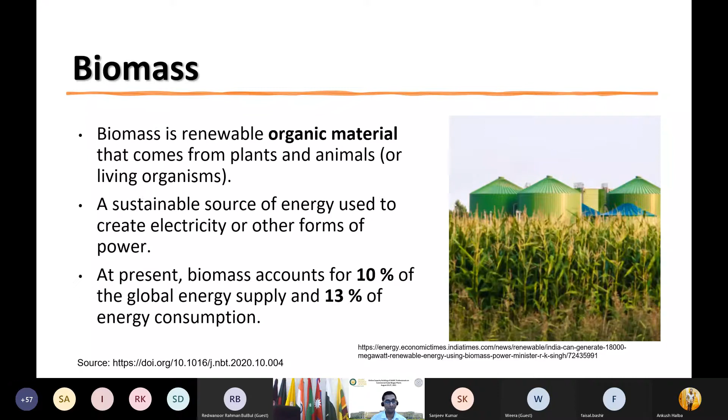So some of the examples that would be encompassed in biomass, or biomass feedstocks, or biomass sources would be the different trees or the crops. The first one is forest, then agriculture. Then we have the industrial residues, mainly the organic content, municipal solid waste that is coming after the use, animal manure, and also the sewage waste. So all this would come into the bigger ambit of biomass.

We'll again have a discussion on all these aspects as we go one by one, but just to give you an idea. And biomass can be converted into useful energy through a lot of pathways. It's not just biogas. We have a big range of thermochemical conversion, which would be used for producing different kinds of fuel.

If we go for low temperature, it can help to produce coal-like substance or oil from biomass using hydrothermal liquefaction or pyrolysis. There are processes like gasification for producing syngas, combustion to directly produce heat and electricity. We have the fermentation process, which can produce bioethanol, and a chemical conversion, which basically uses transesterification for production of biodiesel. And all these conversion pathways would be happy to take certain kinds of biomasses. And this is equally true with our focus, that is biogas production.

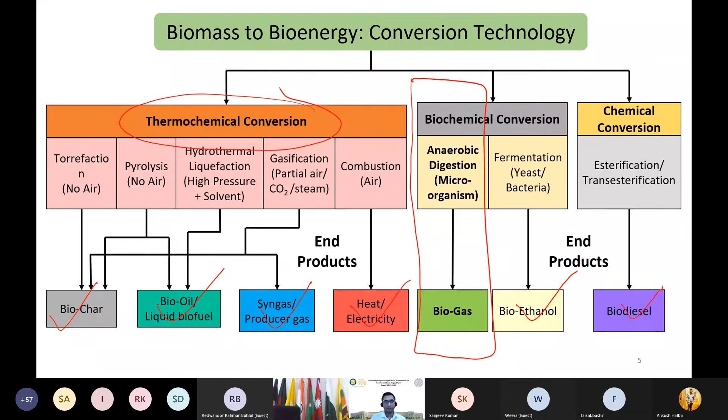So if I was to make a very basic guess of what kind of biomass would go very nicely with biogas production, or anaerobic digestion, as is the scientific term, because this process is anaerobic and it's basically a digestion by the different microbes. So we have the term anaerobic digestion. So I would need a biomass that has a good water content, at least more than 50%. And then I would also go for biomass which is less bulky and fibrous. So this is the area I'm looking towards for anaerobic digestion.

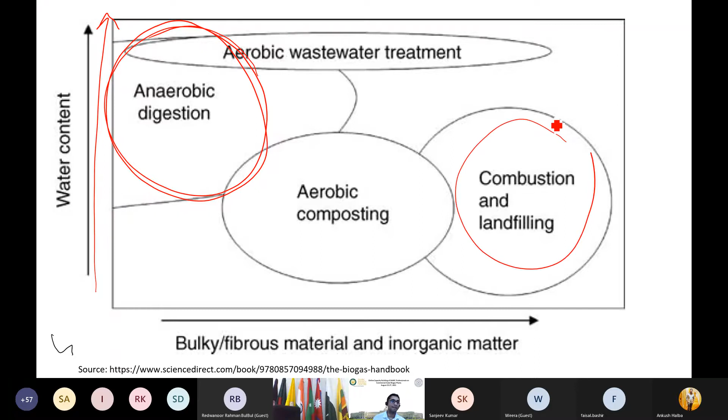So if you were to explain to a layman what kind of feedstocks you would use for biogas production, there are two things. It should be less bulky or fibrous, and less inorganic matter. If you have a biomass like wood, it's much more bulky, it has much more fibers, and it has some amount of inorganic matter in terms of ash, kindly go for combustion. Don't go for anaerobic digestion. And it is always helpful to have a good amount of water content.

So biogas, we have been trying to understand about it in the past few classes. It's basically a mixture of gas which would primarily consist of methane and carbon dioxide. So it's around 50 to 70% of methane, 30 to 40% of CO2, and then some amount of H2S, water, and some trace gases maybe. It can again be produced from a huge amount of feedstocks. And it is produced by the process of anaerobic digestion with methanogens or anaerobic organisms. It's basically a closed system which is happening in an anaerobic digester or a bioreactor.

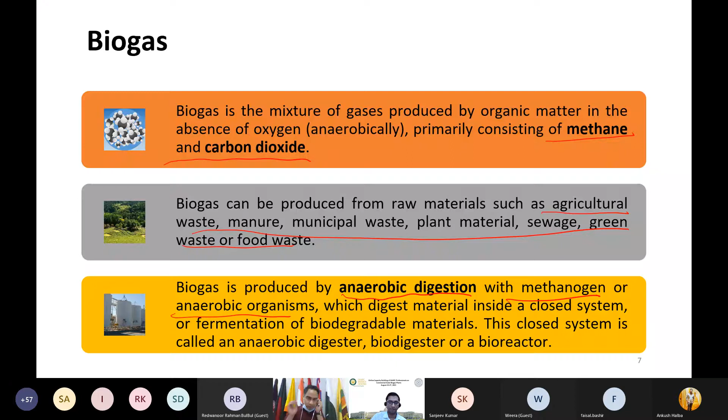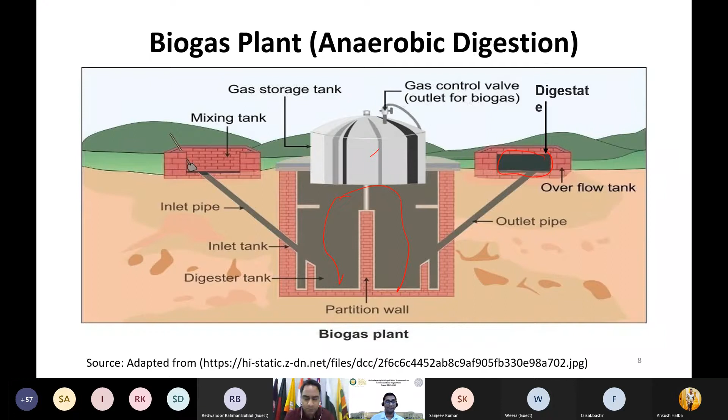And this is what a typical digester would look like. You all must have an image in your mind. You would have an input, and this is where the biomass gets digested, the gas gets collected, and then you have the digestate coming out from it. And this is how a typical biogas plant would occur. There might be different stages to it, different types of look to it, but nonetheless, most of the process looks similar. But inside it, there is something very complex happening.

And if we are co-digesting a number of feedstocks, which is a normal practice nowadays, these things become even more complex. Some reactions will be happening faster than the other, but there would be also some reactions which will be producing much more methane, which is our final product. So we need to see the trade-off and the balance between this. Like, do we need to produce the biogas in a faster way, or do we need the content to be more economic in nature?

So coming back to the topic of today's presentation, what are the different kinds of feedstocks that would be available to us? If I go with the taxonomic rank, the feedstocks could be divided into either a plant origin or animal origin, as simple as that. Then there could be the sector in which the feedstocks are getting originated. It could be the agricultural sector. We have the animal manure, which is by far the largest feedstock being used in the Asian countries, or in the SAARC countries, I would say.

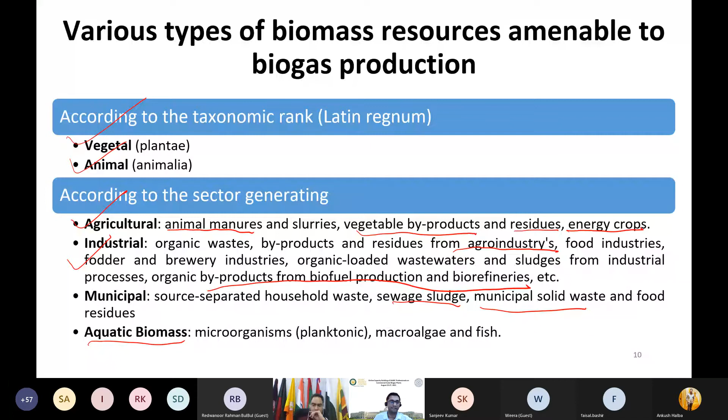Apart from that, there's one other way you would classify biomass. I've already taken you through two of them. One is the taxonomic one, meaning either plant origin or animal origin. Then the other could be the sectors. And then there is also what is called the generations of feedstocks. As the technology has been progressing, there have been different generations of biomass feedstocks that have been proposed. Around 50 years back, people were trying to produce bioenergy, and the common ways at that time were biogas as well as biodiesel, transesterification.

And what many people were doing is they were using the crops which were used for food purposes for production of fuels. And then there was a huge lobby against that. Like, how come you are using the crops that are meant for human consumption for production of energy? We have a huge population in the world which doesn't get food to eat, and at the same time you're trying to use these crops for providing energy for another section of the people who are very well to do. So there was a lot of opposition to that. It was reduced. So 1G feedstock basically means those feedstocks which have a food value attached to it.

Then the scientific community started looking towards different feedstocks which don't have the food versus fuel conflict. So this conflict has to be totally avoided. Then came the 2G feedstocks that mainly comprise the lignocellulosic biomass. And it's not lignocellulosic biomass as such, but it consists of the energy crops, including the grasses.

As well as the different residues. Now, these residues can again be divided into three types. First one is the primary residues, which means they're available in the agricultural field. A very common example is the straw that we see in the fields. It's spread out. You need some technology for collection of it, but it's available at the field, and that's called

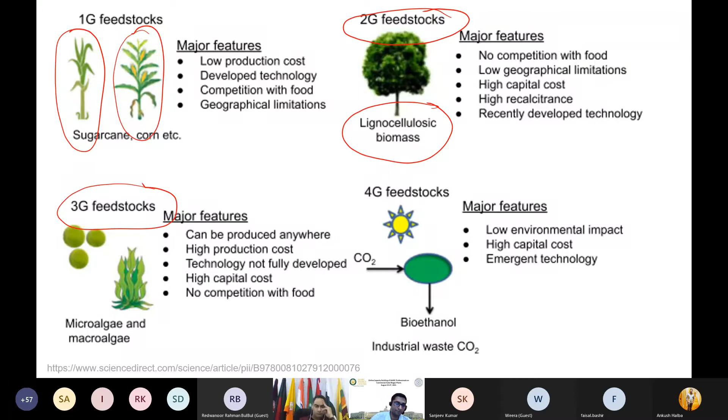And recently, they came up with something called 4G feedstocks. What I mean by 4G feedstocks is, can I genetically modify the bioorganisms to produce the final product? Now you have been hearing about different kinds of heavy metals or different things that can be prohibitive for production of biomass. Can I genetically modify the cell structures such that these problems don't arise in the future?

So any biomass feedstock that has been genetically modified to suit a particular application would be coming under the 4G applications. And very typical examples of these have again been algae. And there has not been much research into the production of biogas from 4G feedstock, but it has mainly been termed as bioethanol production.

So when we are going to talk about biogas, there could be either 1G. In 1G, there could be energy crops like maize, which could have a food value. Then the 2G feedstock, which will be coming from different residues, and a major among them would be cattle manure. Then 3G feedstocks, which would comprise the aquatic biomass. 4G feedstock is currently at the lab scale, and it won't do us any benefit if we talk about it as of now. But if any one of you is interested, kindly go and have a look into these.

Now, let's have a brief perspective of the SAARC member states as well. We'll briefly go through them, what are the major feedstocks available, and if time allows, we'll come back to this analysis again. So if I talk about India, and since I'm based in India, this is the country for which I would have the maximum amount of information. A lot of potential has been attributed to two things.

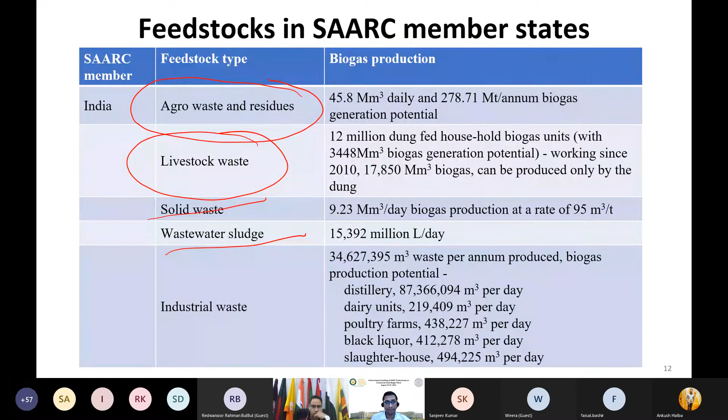Then we have a huge amount of agro waste as well. And a typical example is the straw waste that lies in the fields. We have a huge population, and with population also comes solid waste and wastewater. So these are the four areas in India which would have a huge biogas potential.

If I talk about my neighbors, Pakistan again has a huge amount of livestock, and this is where they can use it to produce a huge amount of biogas. Plus, they have huge metropolitan cities as well, and these metropolitan cities would be a source of both sewage as well as municipal solid waste, and they can be used very efficiently because earlier very archaic technology was used for the treatment of these processes.

But now the thinking is changing with the development technologies that are coming from the West. People now want to extract as much profit from the conversion of the waste as possible. So the waste are no longer waste, but they have a value attached to them. Nepal again has a good amount of livestock population which they can use for biogas production.

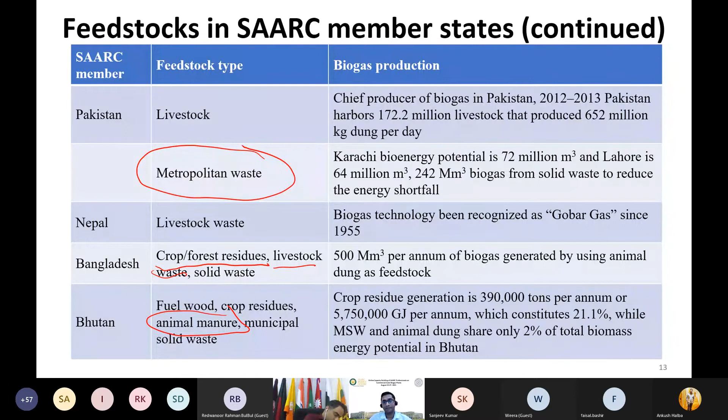Bangladesh, another agrarian country, could have a huge amount of crops and forest residues and livestock waste. Bhutan has a good amount of fuel wood, but it can't be used directly. It could be used as a co-digestion, but the major source again remains with respect to the animals. This is something similar for Afghanistan as well, which would have a huge amount of agriculture. And if I talk about my neighbors in Sri Lanka and Maldives, then there is the possibility of aquatic biomass there. I'll be coming back to this discussion towards the end of my presentation.

Okay, so let's go one by one to the different types of biomass feedstocks that are available. The first one and the most common being biogas, animal manure. In India, we also call this gobar gas. Now, gobar is the Hindi word for animal manure, and so you can see the relationship. A lot of things have been attributed to animal manure, and one of the primary reasons why animal manure was being used for biogas production was because it was a menace that people wanted to do away with.

At the same time, it is also responsible for a lot of emissions. If I go by the FAO statistics, animal manure is responsible for 18% of the global greenhouse gas emissions. And you would say, how come this is too high? The reason being, if I talk about the US statistics, this animal dung is responsible for 9% of the human-induced emissions and 37% of emissions of methane.

Now, methane, you need to understand, has a potential that is more than 20 times, depending upon the time scale you're looking at, that of carbon dioxide. So 1 kg of methane is equivalent to 20 kg of CO2. Plus, it also has some emissions with respect to nitrous oxides. So this was the reason why people wanted to convert this particular waste into value, because anyway methane was leaking out of it if you just leave it on the land. So why not have some energy being produced out of it?

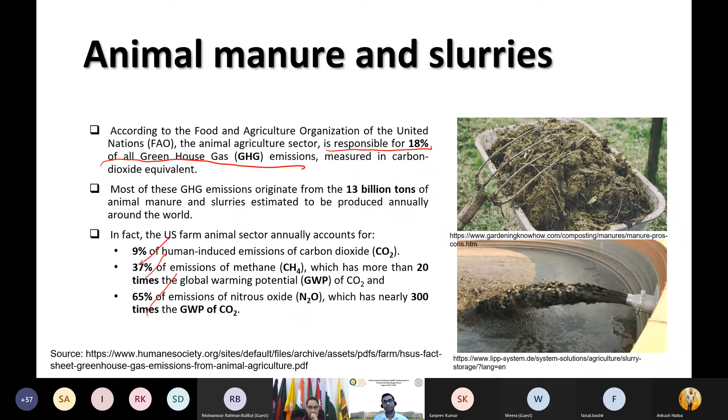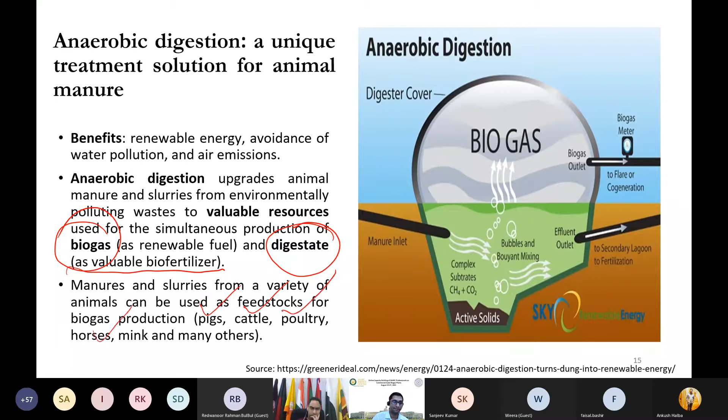And then anaerobic digestion came out to be a unique solution for animal manure. It was easily available. It was easy to operate, and the output was that you get biogas, and you also get a digestate, which is a valuable biofertilizer. And manures could be coming from a variety of animals. It could be pigs, cattle, poultry, horses. It could be different in different countries. But there could be a difference in the yield of the methane.

So I told you, the primary reason why people wanted to convert the animal manure was environmental. They were not looking at economic. The economic thing is something coming up very recently. When people started working, they thought there's value to it, and then they started quantifying it. So here I give a comparison of the type of feedstock and the methane yield. The methane yield could be either meter cube of methane per volatile solids, or it could be per meter cube of the input feedstock.

Now I remember yesterday someone asked which is the feedstock that would produce the most biogas. This question is a bit tricky to answer because the amount would vary based upon whether you're talking about the solids available or the volume, because we have a density that we need to multiply. When we are talking about slurries and solids, the density could be hugely different. So the methane that is produced per solid would be very different from the methane that is produced per volume.

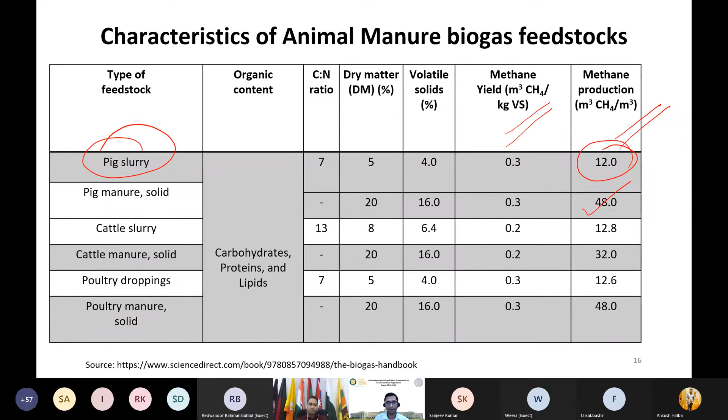So again, you can see if I am talking about solids, the methane content could be high in terms of meter cube, but in effect, I was always working with slurries. So I will also prefer to work in slurries, and this brings down the methane content, which is the major energy source. You also need to understand that not all the biomass feedstocks are going to give you the same composition of the gas.

Of course, one thing is to talk about the amount of biogas, and the other thing is we also need to worry about the methane content in that, because CO2 is not going to fetch us much value. Of course, you can bottle it and then send it to industries, but the usage of CO2 in the industry is not very great. The only thing that is going to fetch you an economic value, either as a transportation fuel or a fuel to the industry, is the methane content.

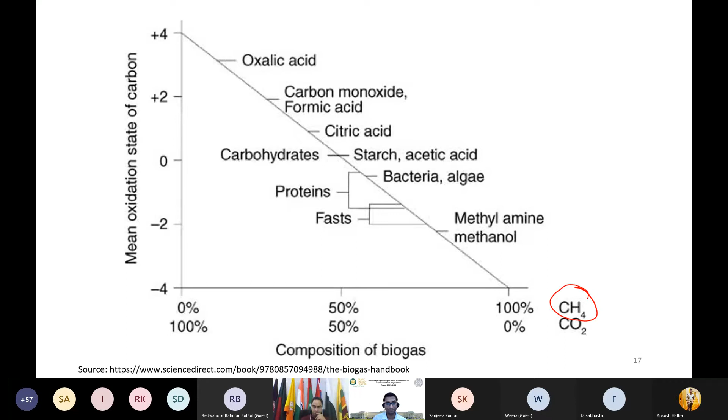So we need to be always also worried about what is the methane content. Sometimes it might happen that the methane content is high, but the absolute amount of biogas is low. So we need to be concerned about that. Now, what are the limitations with respect to the anaerobic digestion of animal manure? The first thing is low methane content. The methane content is not very great.

Then the transportation costs can be high. For animal dung slurries, it has been stated that if you are transporting them for more than 5 kilometers, the process is going to be economically not viable. Of course, these statistics would change from country to country, and there are no rules of thumb. But the general statistic has been that it has to be less than 5 kilometers. So if you're talking about large-scale biogas plants, which I believe most of you are interested in, all the cattle or the feedstock needs to be within 5 kilometers of range. Now that sometimes can be a challenge in itself.

Sometimes the slurries and manures can have a high content of lignocellulose as well. One of the reasons behind it is that normally when you go to the cattle sheds, they don't have a very clean atmosphere, and the dung would be falling on the floor and you would be collecting it. And there would be a lot of impurities going into it, and some of them could be lignocellulose. And when they keep piling up in the digester, this could lead to not so healthy conditions.

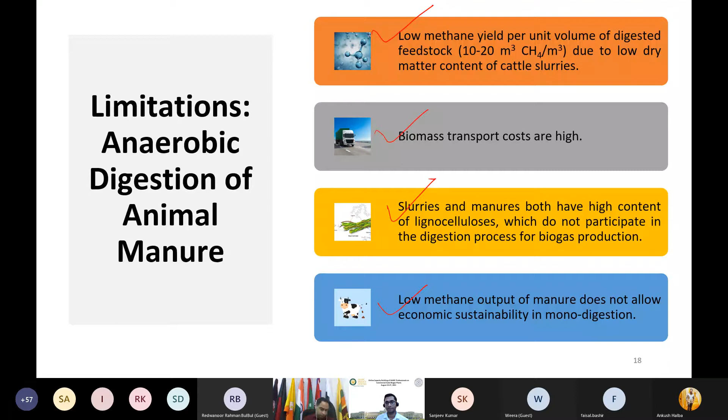And low methane output of the manure does not always lead to economic sustainability in mono-digestion. So what people have normally said is, if I just have animal manure, I would happily digest it with some other things rather than just digesting animal manure. Now remember, why did we start with animal manure in the first place? It wasn't economic, it was environmental. To make it economic, people are now suggesting co-digestion. By co-digestion, I mean using different feedstocks along with cattle manure.

And what are the advantages of it? First, it could lead to the dilution of some of the toxic substances in case the other feedstocks are coming from industry. It could help balance the nutrients because cattle dung has a very good nutrient balance. It also has a good supply of microorganisms, which could help. Economic benefits: it would increase your methane, and higher methane means higher economic benefits. It could also help in increasing the organic loading, which would mean higher methane, and higher economic benefits.

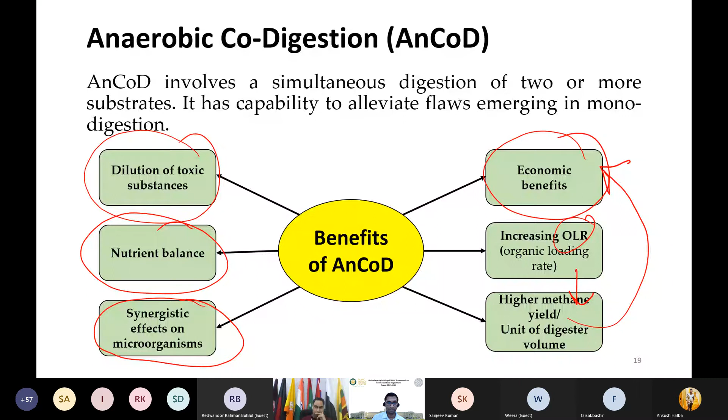So if you look at the future, and if you're talking about the economics and relying on the biogas too much, possibly it would be good to go for co-digestion. Co-digestion means you would use sewage sludge, municipal solid waste, algae, agricultural crops, or other wastes that are available along with the cattle manure. And cattle manure, being a very nice feedstock, would provide a buffer for fluctuations. It would help control any undue fluctuation and provide a steady operation for the plant.

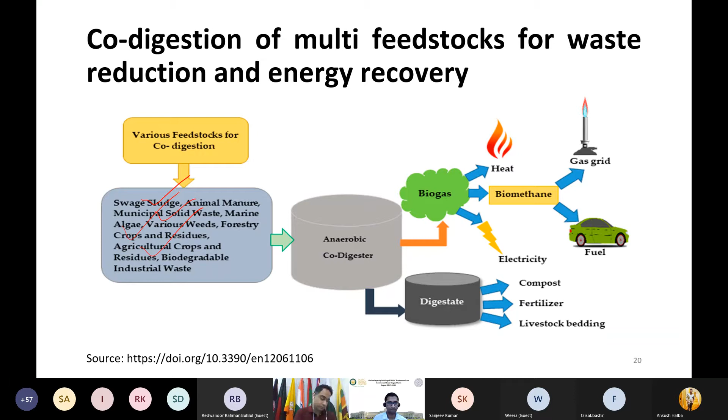And as I've already given you the example of the straw in India, this is one of the possible solutions that people want to look at. One thing you need to do when you have a feedstock like this is reduce the size. The typical size that would be acceptable in a biogas digester would be around 1 centimeter. It would ensure good digestion.

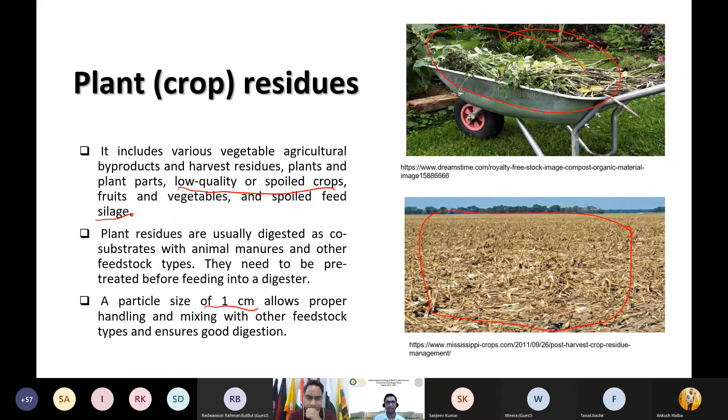And like my colleague, Professor Sanjeev Kumar, has already given you a glimpse of the different pre-treatments that might be needed. What really happens in the pre-treatment is that you decrease the size, and this would certainly be needed if you're talking about crop residues, because they have a good amount of lignocellulose. Lignin, cellulose and hemicellulose taken together are called lignocellulose, and this doesn't go very well with the bacteria or the microorganisms. These are living organisms, and you have to go by their likes and dislikes.

The first thing is you have to reduce their particle size. The other thing you need to do is break the bonds among cellulose, lignin, and hemicellulose. Till the time they are together, they are very difficult to digest. Once they are in the form of cellulose, hemicellulose, and lignin, they become somewhat easier for the bacteria to convert into simple molecules and finally into methane. So for these kinds of feedstocks, you would have to go for different pre-treatments.

And as has already been told, different kinds of biological treatments which are based on bacteria or enzymes are gaining a lot of prominence nowadays, the reason being they don't have any harmful side effects and they are not very energy intensive.

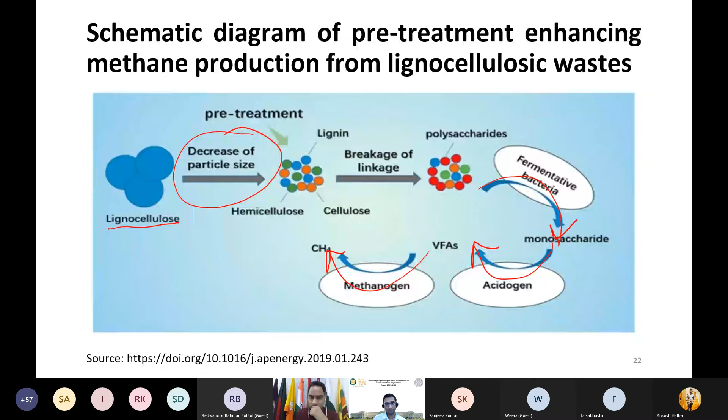Then comes, why don't we grow energy crops? There are many crops that are grown just for the production of energy. These kinds of crops wouldn't be seen in a good light in the SAARC countries, because we have a huge population load and we don't have much land to spare for growing energy. But nonetheless, we can discuss those. This is finding a lot of application, like maize is grown in huge quantity in countries like Germany or Sweden, where it is grown on a large scale for producing energy.

And again, there are different generations of energy crops. First, it was mainly crops which have food value as well. Then came the second generation crops like switchgrass and miscanthus. And now they're also looking towards the third generation, which is slightly different from the generations we have for biomass feedstocks. People have been going further. The advantage is that you have the energy crops.

And one of the previous disadvantages that I forgot to mention was, if you're talking about residues, those would be available only in the harvesting seasons, of which there could be 2 or 3 at maximum. Normally you would want to operate your plant in a continuous fashion. This is not a chemical engineering plant which you can start up or shut down at your leisure. These are bacteria, they have set up a colony, and they want to live peacefully as long as possible, so they would want the plant to run as long as possible.

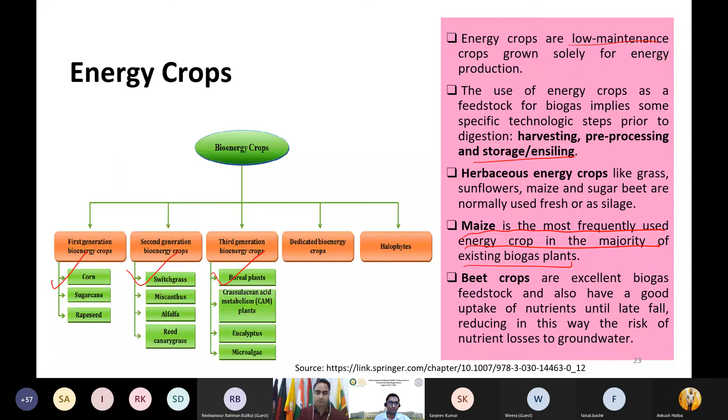And these kinds of crops can have a variable methane yield. You can see the methane yield could be very different. So we need to decide, and not every energy crop would be able to grow everywhere. But if you look, these are some of the prospective yields, and there could be a high difference among them. So we need to do some experiments before we go on with the setting up of an energy crop, specifically for bioenergy production.

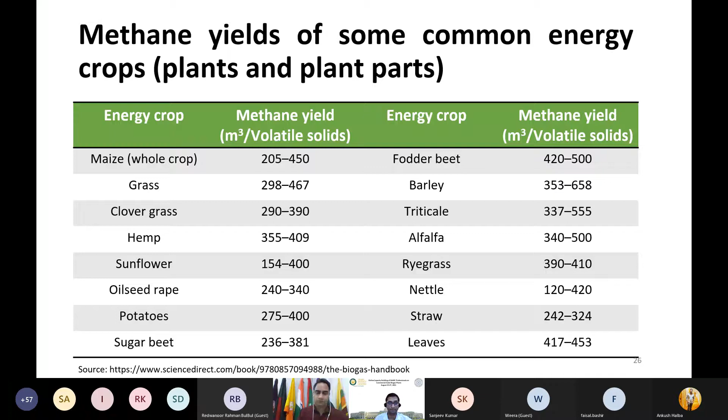Now coming to the limitations of energy crops. One basic problem that you would come across when you're growing crops specifically for the production of biogas is that the composition of the crop, and thus their suitability for anaerobic digestion, would vary with the stage of maturity. Now, if you are cultivating the crop 3 times in a year, I'm talking about some of the crops that are not available throughout, what would happen is, as time proceeds and as the crop matures, its lignocellulosic content will keep on increasing, and the moisture content would be decreasing.

So just see any plant that you have planted in your life: in the initial stages of its life, it's much more green and starts to build up more matter as time proceeds. And this is true with energy crops as well. So as far as the suitability for anaerobic digestion is concerned, we would like to cut these crops while they have a huge moisture content. But this makes it difficult for storage. The storage life decreases if we are cutting the crops when they're still not matured.

If I go to the other dimension, if the crops are getting matured, they have a good amount of lignocellulose, the storage becomes easy, but at the same time, they would need a good amount of pretreatment as well. So this is a trade-off: you would need to understand at what time you need to harvest your crops. If you harvest it early, it would be good for biogas production, but bad for storage. If you harvest it later in its life, it would be good for storage, but you would need a pretreatment for biogas production. So this is a trade-off you should be able to answer if you're looking towards energy crops.

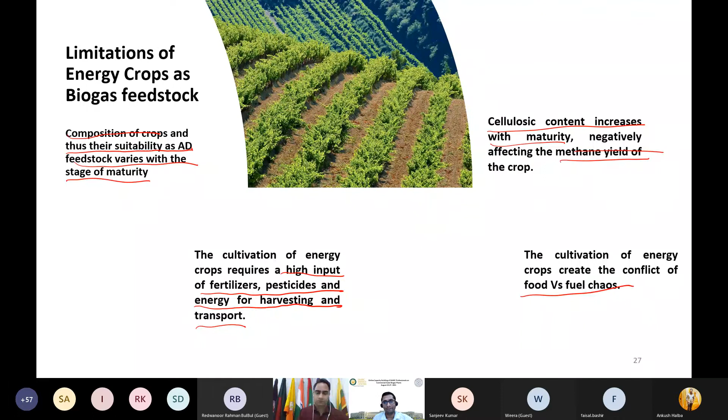Then it also needs a high amount of fertilizers and pesticides, and there's energy in harvesting and transportation as well. So if you're using high-end equipment for producing these crops, it would need energy and you need to justify that. Again, the cellulosic content will increase with maturity and it would negatively affect the methane yield. And in countries like ours, like in the SAARC countries, there is going to be a food versus fuel chaos, whether we can use this land for energy crop production.

And then comes another feedstock, which is called the industrial feedstock. Now we have huge industries. To give you an example, there's the food and beverage industry, fodder industry, fish processing industry, milk, starch, pharmaceuticals, biochemicals, cosmetics, paper and pulp, and of course, slaughterhouses. So these are huge places which have a huge amount of side products or co-products. And biogas could be one of the avenues for making use of this, because most of these are available in a localized fashion. You don't need a collection cost or a transportation cost.

But the problem is that they could have their own issues; they could have some inhibitors or some characteristics that make them unsuitable for long-term use in the production of biogas. And that is why a common term used for feedstocks like this is methane boosters. Why don't you run your biogas plant based upon the feedstocks that are available in plenty, something like cattle manure or residues, and then use these feedstocks as methane boosters? Because if you put too much, or if there's a fluctuation in the properties of these feedstocks, this could render your process useless. But at the same time, some of these feedstocks have very good methane yield, and that is why the term methane booster is being used.

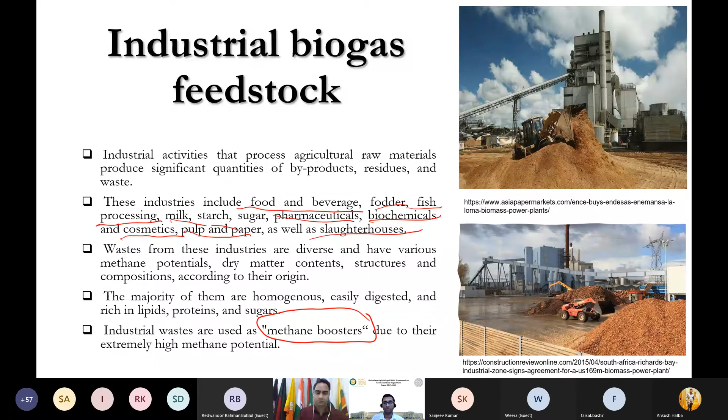So what people are proposing is, base your biogas plant on some of the feedstocks that are easily available and use these industrial feedstocks as methane boosters, such that the plant doesn't go to either of the extremes, if you are considering the pH or other contents like ammonia, which are not very good for the functioning of the plant.

Again, these kinds of feedstocks can be digested either in decentralized large co-digesting plants or at the industrial production plants. But if you go for co-digestion, they can help provide increased process stability and less sensitivity to inhibitors like ammonia and sulfide. So again, co-digestion is one of the things that has been proposed as the to-do thing if we are planning to use industrial feedstocks, because if we are not aware of what kind of things will be coming out of it, there could be troubles.

And also, as the regulations are increasing, and this is specifically true for the European countries, they wouldn't want the fertilizers or the manures that are coming from the biogas production, if the feedstock is coming from a harmful industrial product, to be used as a fertilizer. And this is quite apt as well. These kinds of regulations might not be currently there in the SAARC countries, but in the future, as we are growing more and more sensitive towards the human needs, these kinds of regulations come in. If the feedstock is coming from an industry that involves some pathogens or some harmful chemicals are being utilized, and the fertilizer is coming from the anaerobic digestion of that, there could be issues.

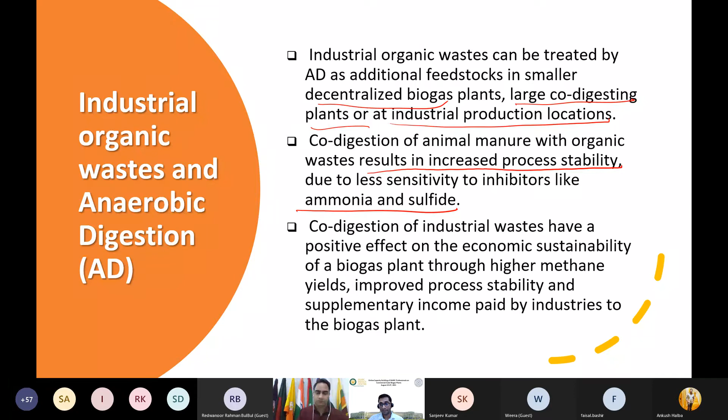Again, I've tried to highlight this fact. One thing that is coming up in a big way, or that is showing a lot of potential, is the concept of biorefinery. So a refinery is a chemical plant which has a lot of products. And earlier people were talking about either biomass gasification or anaerobic digestion or biodiesel production. But now they want to look at biomass as a whole, because different features of the biomass could be used for production of different kinds of products.

And this is true with the bioethanol products. In India, we are going at a very fast rate with the production of bioethanol that can be coming from biomass. And one of the leading countries in this, of course, is Brazil, which has a huge sugarcane population. And these bioethanol plants can have a good amount of silage that can be used in anaerobic digestion. And this could be used for production of gas that could be used either for electricity purposes, or as a fuel. Methane is an energy carrier, and it's up to you how you want to utilize that.

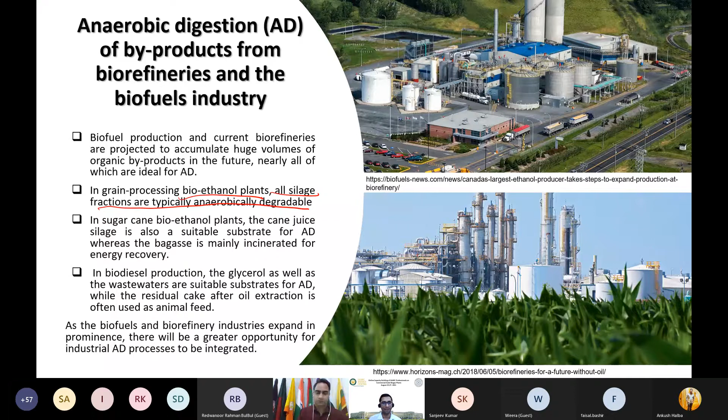Then comes the municipal solid waste. And here I use the term source separated organic waste, which means people have been comparing the different waste, how it comes in. And it's always good to use source separated organic waste. And this is being done very well in the industrialized nations. If I talk about India, this practice was initiated around 5 years back, where we have different bins for different kinds of waste, but it hasn't been able to get as much traction as needed. But as time proceeds, I am hoping that awareness would be reaching, and we would have source separated organic waste available from our homes. And if that is the case, this waste could very well be used as a biogas feedstock.

And again, we have the different community kitchens or messes that we have in different campuses in India, like campuses of different big universities or different corporates. They are very nicely doing biogas from waste, but again, they have a centralized location in terms of the community kitchens. But if we are able to do source separation at the homes, this could very well be done on the city level as well.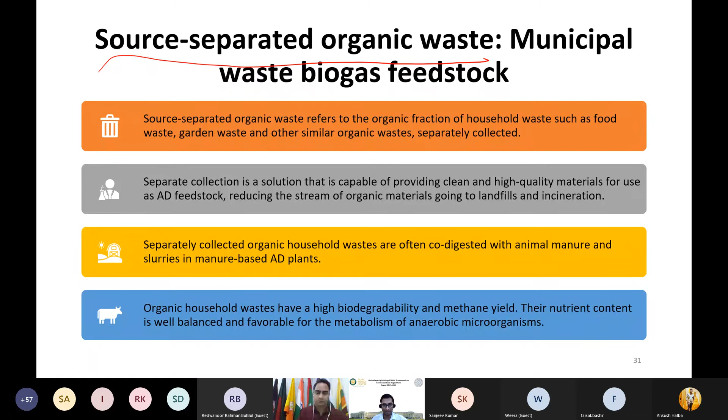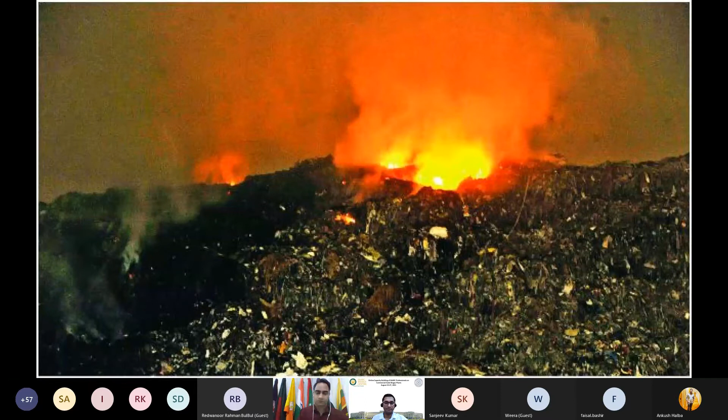Because what is happening is, anyway, when this waste goes to the landfills, there are fires. If you have seen the landfills in India, we have huge landfills outside the cities, in Delhi, Mumbai, Chennai. The moment you are out of the city, you would have a picture like this. And if you happen to see them at night time, you would see the fires burning. So this is nothing but methane escaping and burning. So rather than methane escaping, why don't you use that for converting to biogas? And then there's another technology which is called landfill gas.

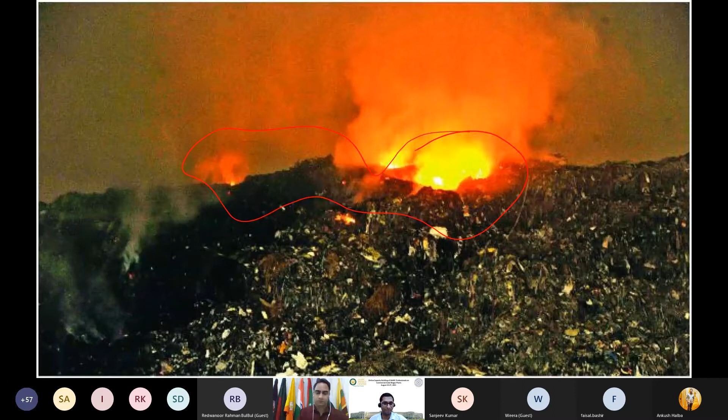That is again something very similar to biogas production. I wouldn't dwell into that. That's a different technology altogether. But if someone is interested, this concept is gaining a lot of prominence again in the industrialized nations, that they would capture this landfill gas and then use it, because methane is anyway coming out. But it is somewhat different from biogas production because there's no digester involved.

And this is a framework for municipal solid waste that has been proposed in India. As per the official guidelines, this could be a composition. Almost 20% of the waste would be very good for anaerobic digestion or biogas production, and this could yield a good amount of value. We did a similar study last year.

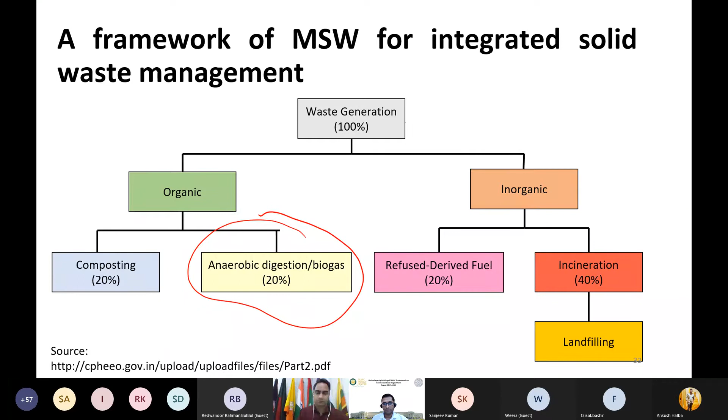So this particular mass flow, if you can see, is for the municipal solid waste plant in the district of Saligaon in Goa. Goa, I believe all of you are aware, is a well-known tourist destination in India, and we are doing this study there. They have a municipal solid waste plant being set up there, and almost 40 tons per day of that waste is being used for anaerobic digestion.

Because of this anaerobic digestion and the electricity production, the whole plant is now energy independent. It is supplying electricity to the grid and it is taking nothing from the outside. So this could be a huge application of municipal solid waste. If the segregation is done nicely, and if that segregated material can be subjected to a well-run anaerobic digestion, municipal solid waste could be a very nice source of energy, such that it could help in running the whole plant in an energy neutral or energy saving way.

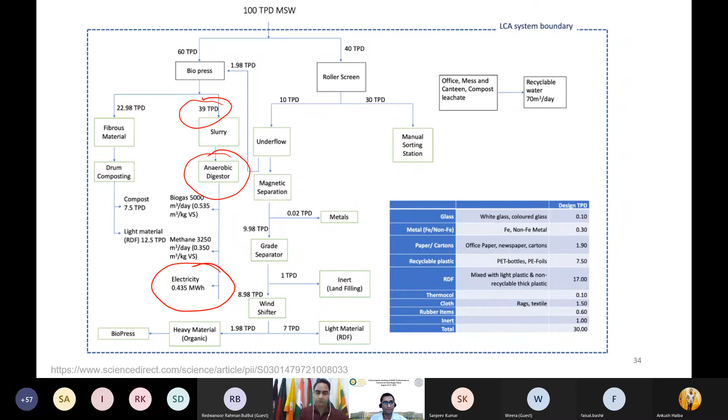Again, people have many times been talking about whether they should collect the waste first and then do a segregation, or they should have a source segregated sample. A lot of the community is of the opinion that source separation is always better than collecting the mixed waste and then separating it, because when you're separating after mixed collection, there are a lot of impurities that might not be separable, or the cost might increase.

So people are of the opinion that if we want to work towards biogas production from solid waste, source segregation could be a nice way. Even from not so separated waste we can take a certain fraction, but a major fraction should come from source separation. That would provide the biogas digestion plant with much of the feedstock that it would need to run nicely.

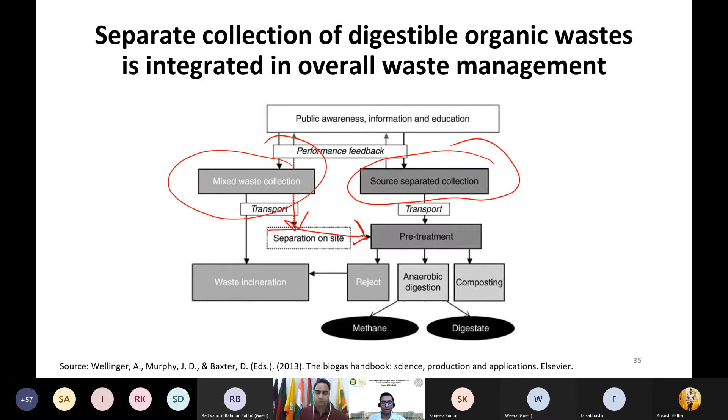Then again, what are the limitations? The first limitation is the separate collection, which many people would not want to do. It again has an economic aspect to it: the collection cost increases, since you would have to collect different things differently. This economics would work in different countries in different ways.

Then purity is again a limiting factor. We have to depend upon the people to have done a nice segregation of the waste. Because if some things are not so good for biogas production in terms of inhibition, or in terms of matter that is going to form dead zones, this might not be very good. So this content of foreign materials is heavily dependent on the human aspect, and we need a good amount of awareness among the population for this.

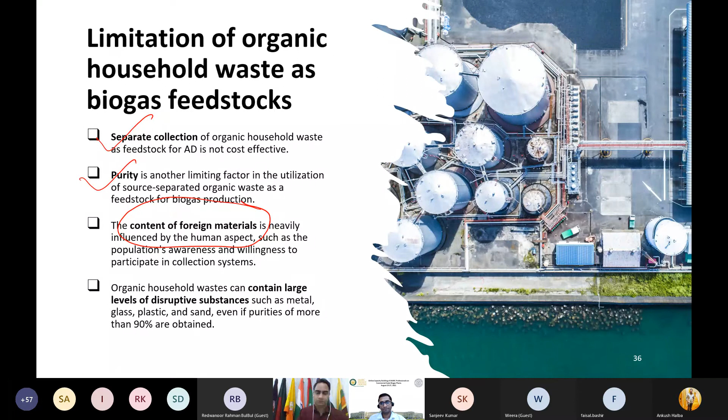Then there is another source of biogas production, which is the anaerobic digestion of sewage sludge. Typical sewage treatment would do a primary treatment, then a secondary treatment, and in the secondary treatment they would be using an aerobic process, like ASP or activated sludge treatment processes. But with the availability of UASB reactors, or upflow anaerobic sludge blankets, and similar reactors, people now want to go for production of biogas from the sludge, and this is gaining a lot of emphasis.

Sometimes it might need pre-treatment and sometimes it might not. It depends on where your sewage is coming from. Sewage sludge is often co-digested with manure, because it has a huge potential for biogas production because of the organic matter present. But one of the problems is that this feedstock might have a high content of pollutants, and with the risk of problems like COVID, which we are currently going through, people are of the opinion that a lot of the prevalence of the disease is through wastewater. So these kinds of things need to be kept in mind.

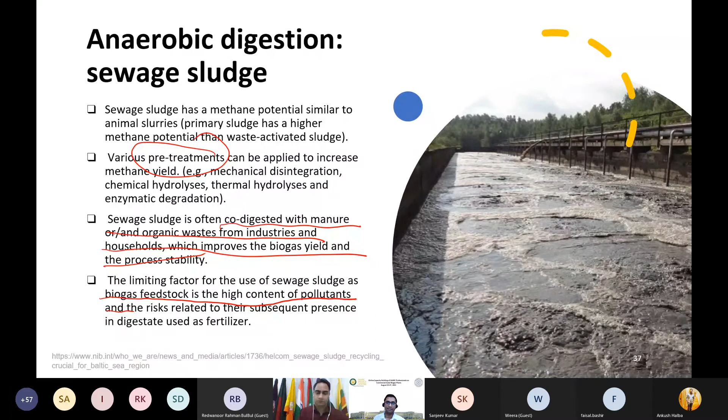And if this water treatment is being used for production of anaerobic digestion and then leading to fertilizers, the pathogens can be transferred to our food chain. And this is something that has to be looked into.

Then comes another interesting feedstock that is in the ambit of the aquatic biomass. Now, aquatic biomass can be divided into two: the macroalgae and the microalgae. Macroalgae basically refers to the seaweeds, and microalgae are small organisms, quite often single cell, and they're also called by the name cyanobacteria. And the advantage of these kinds of feedstocks is that they wouldn't require land in case you're growing them in the available water bodies.

And the photosynthetic efficiency of their conversion is quite high. They are almost 10 times more efficient than a normal plant for converting sunlight into biomass. But at the same time, there are still issues with controlling their sustained production. Now, microalgae has been big in the market for the last 10 years. But most of the biofuel companies are working in specialty chemicals rather than producing it as a fuel. One of the reasons being that a sustained high growth of algae is something we have not been able to achieve so far.

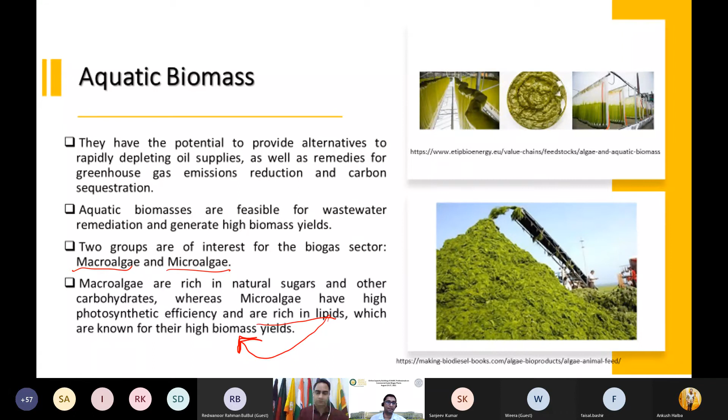But nonetheless, it remains a very high source of lipids, and these lipids can be a good source of biomass. So it remains a prospective source of biomass for biogas production. If you have huge aquatic bodies, you can easily grow them, and the growth of these algae wouldn't normally compete with the food chains or the land use. And this is what makes it special, and it's more sustainable as far as its use is concerned.

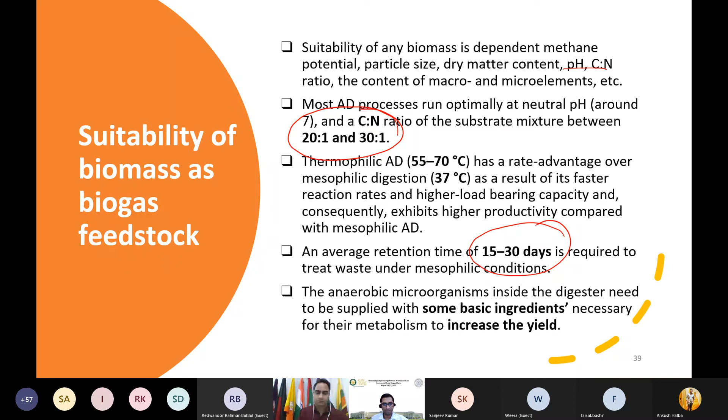So again, there are some suitability issues. Professor Sanjeev has already discussed all these factors, so I wouldn't go into that: the C to N ratio has to be within a certain range. Then we have the thermophilic and the mesophilic microorganisms working in different ranges. The normal retention should be 15 to 30 days. And we need to take care of the pH as well as the micro and the macro elements. Maybe in the interest of time, I can skip some of the slides.

So we need to be aware that there are certain impurities that can come with the different feedstocks which would affect the anaerobic digestion. This is particularly true for agricultural waste. There could be straw and wood particles coming in. They wouldn't have an inhibiting effect on the process, but they could lead to problems like phase separation and floating layers, and they can create dead zones, which would take much of the volume of the reactor, and could damage machinery like pumps, which you need for operating your slurry as well as sludge. So these are some of the things that need to be cleansed.

And then there are certain biomass feedstocks which could have an inhibiting effect on anaerobic digestion. A typical example could be the volatile fatty acids. As such, the volatile fatty acids can be used as a methane booster; they could give a huge amount of methane production. But if their quantity increases beyond a certain limit, they would exceed the buffer limit, bypass the shock levels of the biogas digester, and render the process not so good for the production of biogas.

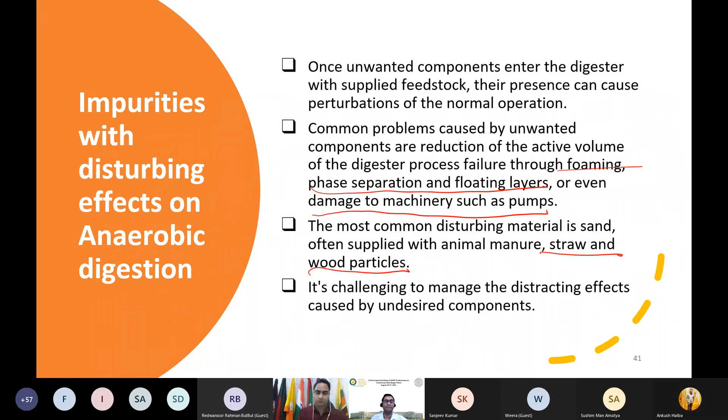So we need to take care of two things: one is the inhibitors, and the other is the impurities. Impurities can affect your machinery or the normal operation, whereas inhibitors are something we should be very careful about because they can cause the process to stop. And again, as I told before, many of the industrial feedstocks are being used as methane yield boosters because they can produce a huge amount of methane.

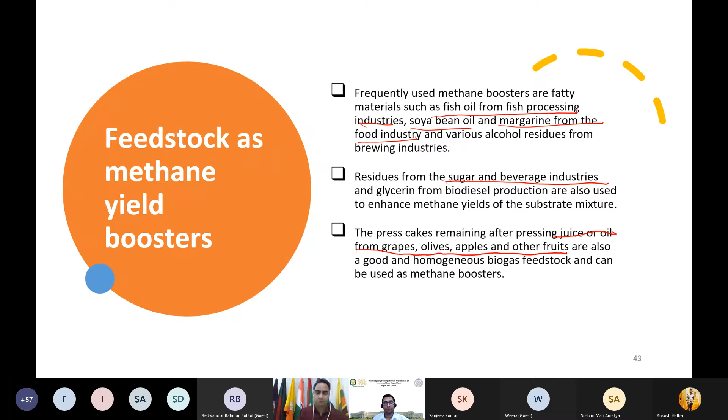Typical examples could be fish oil from the fish processing industries, soybean oil and different oils, or margarine from the food industries. And then we also have the sugar and beverage industries. Another typical example would be the glycerin produced from biodiesel production. The transesterification would have a major co-product called glycerin, and this glycerin could very well be used as a booster for methane. Again, the press cakes from juice and oil industries, producing oils and juices from grapes, olives, apples, and other fruits, could very well be used as biogas feedstock.

So, coming to an end, I will try to wrap up in another 5 minutes or so.

The composition and the characteristics of the feedstock are very vital for design. So, you decide the size of a digester and the operation factor based upon the feedstock. It's not the other way around, where you set up a biogas plant and then search for the feedstock available. It is always the feedstock that dictates the type of digester that you'll be designing, the investment, and the different feed treatment that you would be using. So it is very important.

The feedstock would also determine the quantity and the quality of biogas the digester produces. And both of these would have a specific impact on the economics of your plant. These are the two main products, and this is where you're going to fetch your money. So you need to be aware of that.

An advantage that some people can get from municipal solid waste or sewage sludge is that these kinds of plants normally also earn from tipping fees. You normally pay someone to collect the municipal solid waste from your place, and they in turn pay someone to dispose of it somewhere. So whenever these plants use municipal solid waste, they also benefit from tipping fees, which can help the economics of the plant.

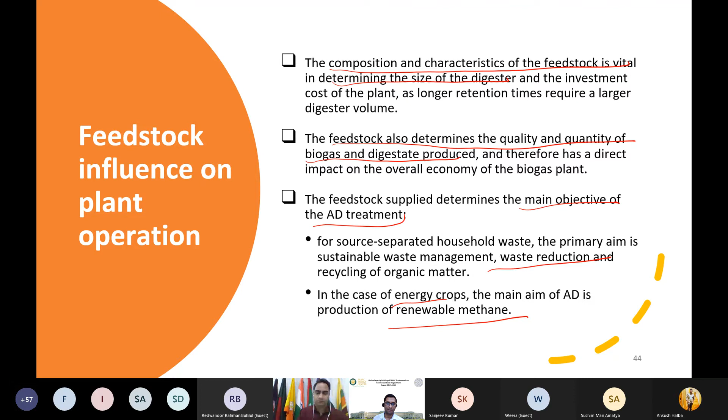Then you also need to determine the main objective of the anaerobic digestion. In some cases, like household waste, this could be just waste reduction, whereas for energy crops it is renewable methane. So your aim should be clear, whether it's purely economic, environmental, or social. There could be overlap among them, but you should be clear in your mind why you want to adopt biogas or anaerobic digestion, and make the decision accordingly.

And this is something that I found to be very nice. Whenever you're choosing a feedstock, you should always account for these 9 things. What is the origin, where is it coming from? What is the methane potential available in the literature? The chemical composition, the contaminant level, the description, the potential hazards, particle size, and the availability.

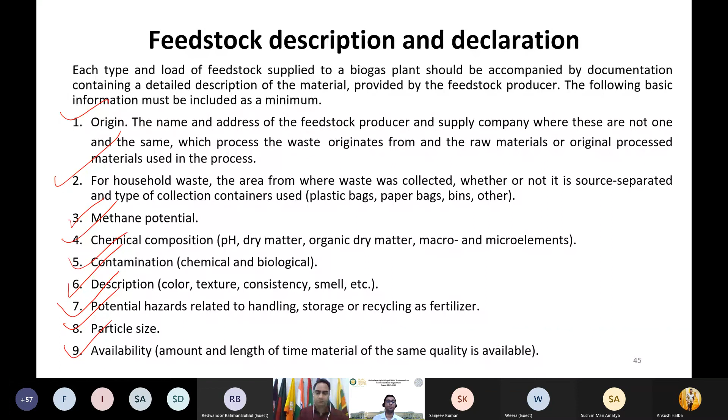These are the 9 things that you should always note down or make a table of when you're working with one feedstock or more than one. This will give you a clear picture of the problems or advantages you can expect in the future. Again, there are some supply chain issues as well with respect to availability.

Now you need to transport the feedstock from the place where it's growing to the plant. These kinds of things would be an issue for commercial scale biogas plants, because they need a huge amount of feedstock. And if you're transporting something as a slurry, say cattle manure, it has 50% water or more. You are just using diesel or gasoline to transport water, and then the truck comes back empty. So that might not be very sustainable.

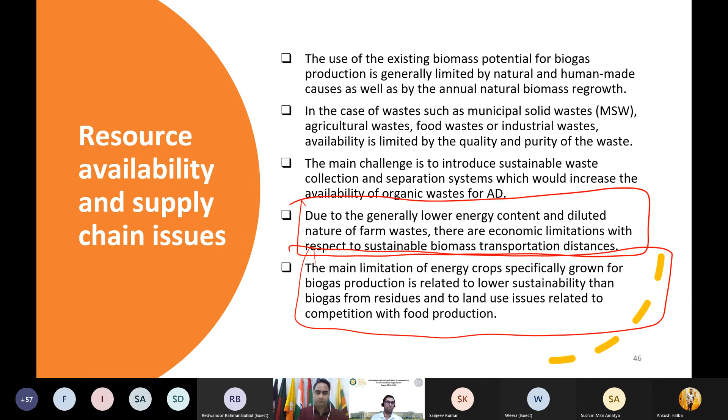This is a major issue with energy crops as well. They tend to have lower sustainability because of intensive agriculture, meaning a lot of fertilizers or pesticides go into them. At the same time, transportation is a big issue because the energy content of biomass is not so much. So for a commercial scale biogas plant, you need to make a careful calculation of the biomass available in close proximity, otherwise the energy you put into transportation will grow very large. It might not be economically prohibitive at present, but it would grow in the future.

So when I'm talking about transportation, I want you to look at the distance between the feedstock and the biogas plant. You also need to look at the intended use. You are not going to get all your profit from selling the methane.

There's going to be a digestate which has a fertilizer value, and you need to transport that. So that digestate can be either solid or liquid. And when you're transporting that liquid digestate, that would have its value as well.

What is the suitability of road access? Like how good are the roads? Because that would again have a direct correlation with how the transportation system is going to be. And in some parts, like in our countries, the road system is not very great.

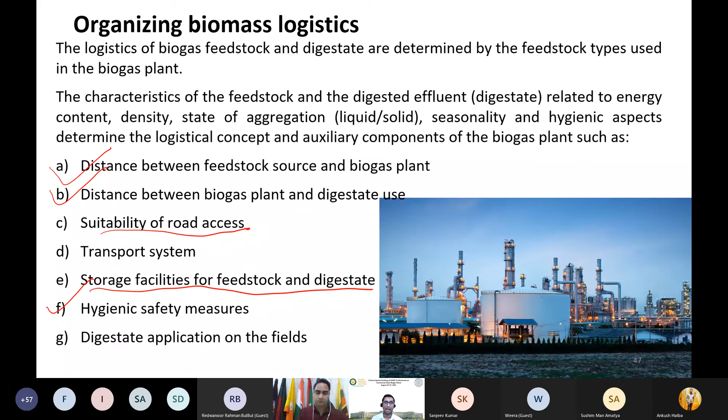We also need to have a look at the storage facilities for feedstock. Because if the feedstocks are coming intermittently or only in the agricultural seasons, we need to have good storage facilities. And of course, for this awareness is not much, but as awareness increases, we need to be concerned about the hygienic issues as well. We can leave it.

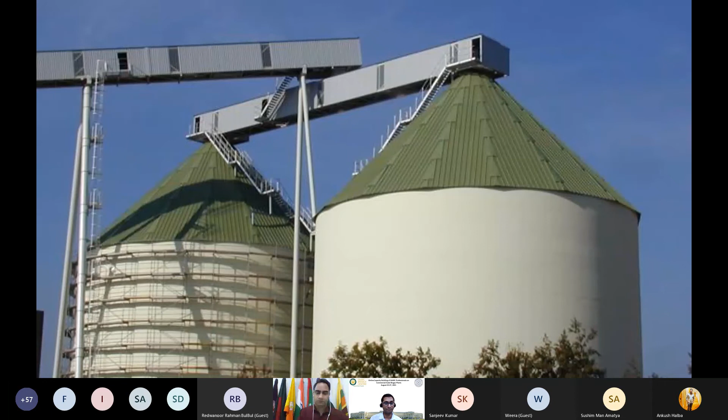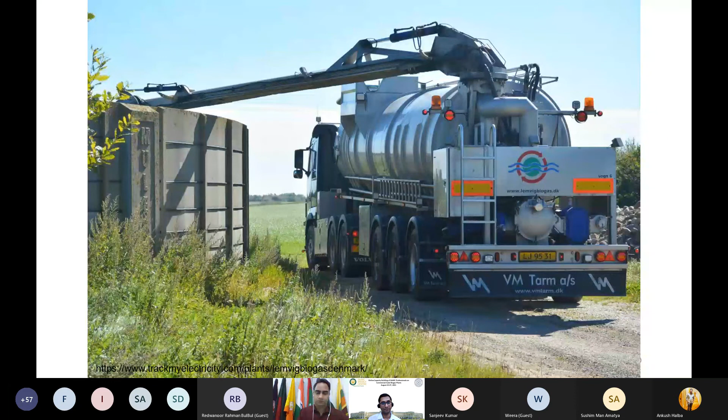And just to give you an example, these are the huge storage bins that we have in European countries. These are specifically storing biomass for biogas production. And this is again an example of the specialized transportation that we have for collecting this slurry. You can see these are specialized trucks that have been made for collecting the slurry, and they're also being used for distributing the digestate in the fields.

With that, I would like to conclude my talk, and a few points for conclusion. A large variety of biomass feedstocks are available for conversion through the anaerobic digestion process. And there is no one feedstock which, I would say, has all the advantages. All of them have their advantages and limitations. So it depends on the place where you're located, and you have to choose what biomass could be of value to you. Aquatic biomass could have good potential in the future.

Energy crops could be good for the industrialized nations, but they might not have much potential as far as our countries are concerned. Again, the industrial sector can be providing a good amount of methane boosters. And we can also look towards the biofuel and biorefinery sector because they have a huge amount of byproducts which could be used for biogas production.